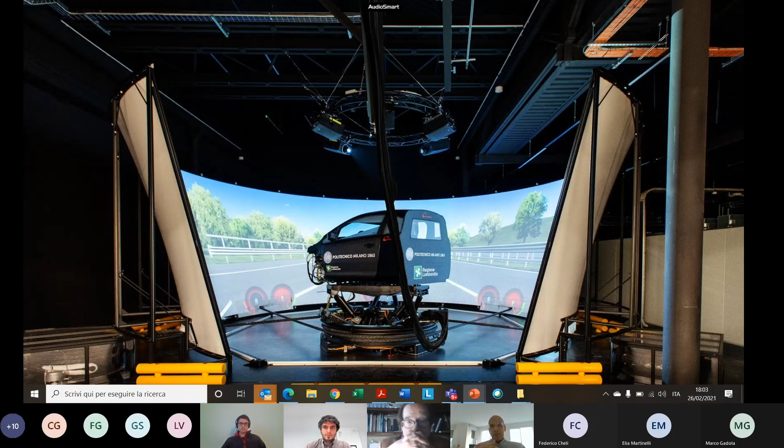We have organized a number of webinars. The first was on Industry 4.0 and the automotive design process. The second was on intelligent transport systems, Industry 4.0 and traffic. The third was on green vehicles and lightweight construction, and today's seminar is on intelligent transport systems, Industry 4.0 and human-machine interfaces. Today's agenda tries to find the relationship between intelligent transport systems, Industry 4.0 and human-machine interfaces.

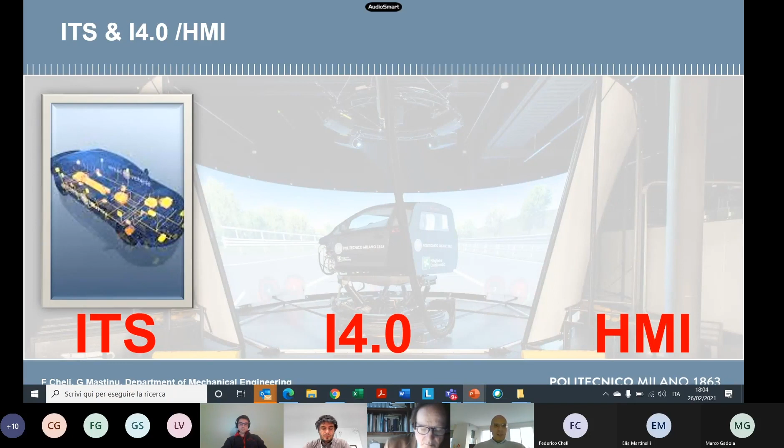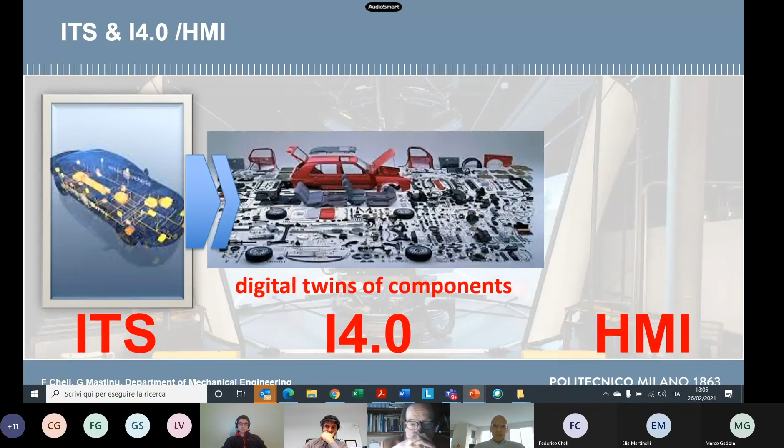Let us try to understand how this relationship works. When we talk about intelligent transport systems, we think of a vehicle with intelligent subsystems connected to the environment. Since the vehicle is composed of such intelligent subsystems, each subsystem has to be designed, and digital twins of components have to be developed to allow the proper design process of the intelligent transport system, vehicle included. This digital twin is a paradigm of Industry 4.0, so you may immediately understand the relationship between ITS and Industry 4.0.

Since the digital twin of the human is not available, we have a driving simulator that allows us to include the actual human in the loop and complete the loop for the design process.

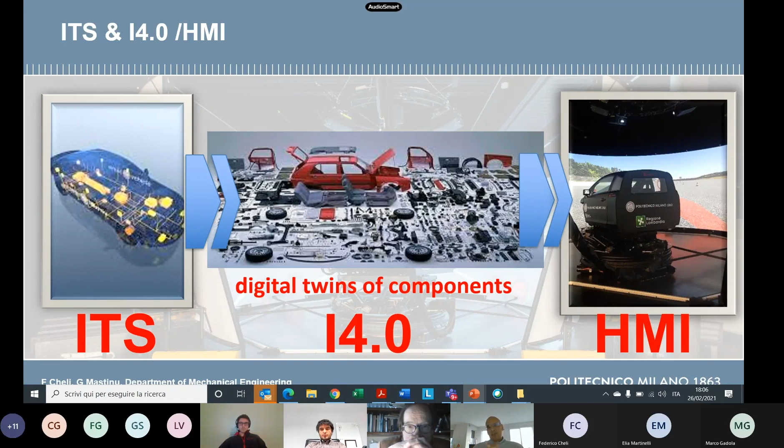Of course, to better understand the perception of the driver, we must record human-machine interface data and signals, and this will be the topic of this evening's webinar. So, today's agenda...

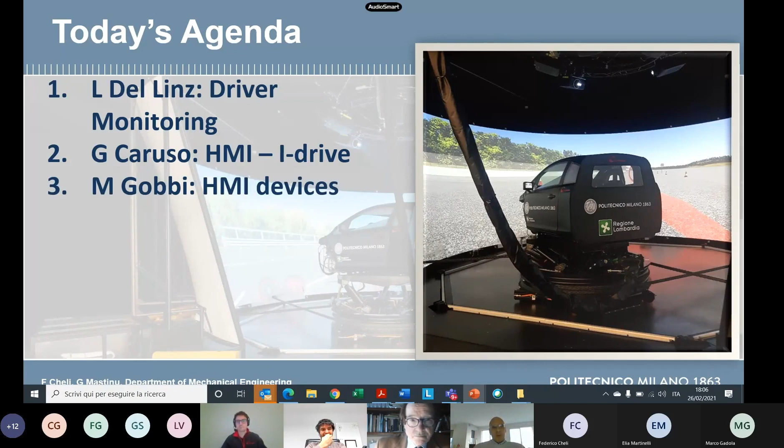refers to the presentation of Engineer Del Linz, who will talk about driver monitoring; Professor Caruso, who will talk about the human-machine interface and the iDrive laboratory of the Politecnico di Milano; Professor Gobbi on a number of human-machine interface devices; Dr. Fossa on the ethics of connected automated vehicles; and finally we will have a discussion.

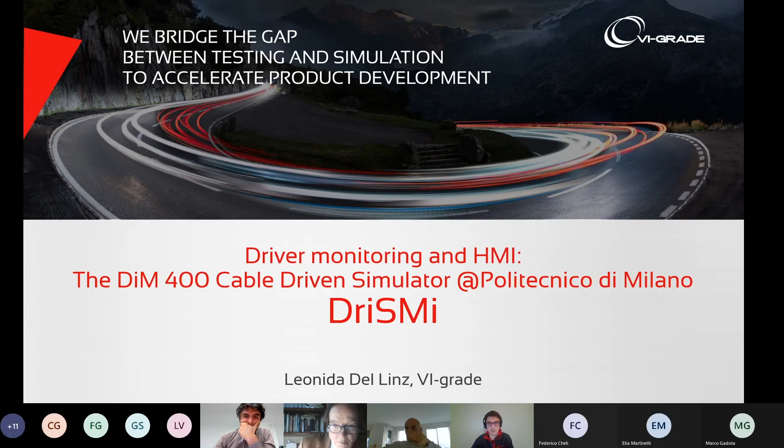As introduced by Professor Mastinu, these slides are about driver monitoring and human-machine interfaces related to the DriSMi simulator at Politecnico di Milano. The first question is: why use VI-BioTelemetry? Why do we need to acquire signals from the driver, active or passive?

Basically, we all know that new technologies will make cars safer and more efficient than ever. It's easy to understand that we need to bridge the obstacle, which is human acceptance of these new technologies applied to new vehicles. Today, for example, ADAS technologies are responsible for a transition in which the driver is no longer a driver, but becomes a passenger.

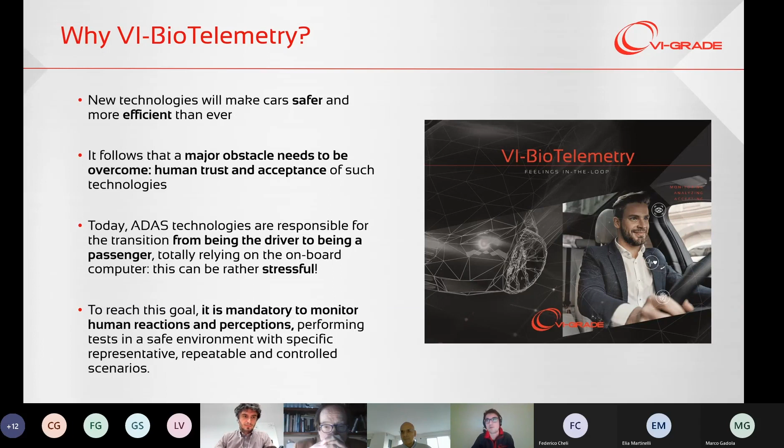So all the subsystems of the vehicle must be accepted by the driver in the best way. To reach this goal, it is mandatory to monitor all human reactions and perceptions, acquiring all the signals we can from the human body, and performing tests in a safe environment with specific, repeatable and controlled scenarios. That is possible using driving simulators, for example.

The VI-Grade solution is the following: we help customers investigate and understand the levels of human acceptance of new driving technologies. We have designed an innovative set of tools capable of recording, elaborating and post-processing all human reactions and body responses to a specific driving scenario using a driving simulator.

To define the stress level of the driver, and also of the passengers, the VI-BioTelemetry package acquires the following human body signals: skin potential response (SPR), electrocardiogram (ECG), and also eye tracking signals, thanks to our partner, Smart Eye.

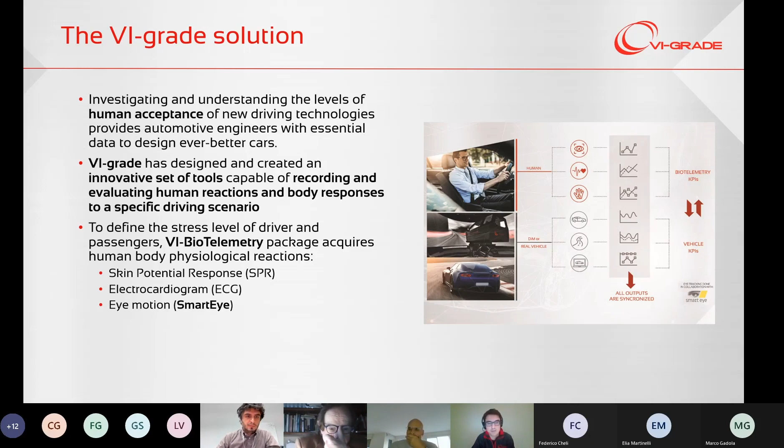A brief story on VI-BioTelemetry: we started working in 2014 in collaboration with the University of Udine and Policlinico Gemelli in Rome. Two years later, the psychologist team of the University of Padova joined, thanks to Professor Luciano Gamberini. Last year, in 2019, we obtained CE and FCC certification for the European and North American markets.

In the last 5 years, there have been a lot of publications in international journals like I4.0, Sensors, Measurements, and so on about VI-BioTelemetry. Regarding the human stress level, this is related to the activity of the sympathetic and/or parasympathetic divisions of the human autonomous nervous system.

The first division, the sympathetic one, is activated when the subject is faced with dangerous or potentially stressful stimulus, and it manages the so-called fight or flight situations. When the sympathetic division is active, among other functions, it increases the cardiac and pulmonary activity, the sweating, and dilates the pupils.

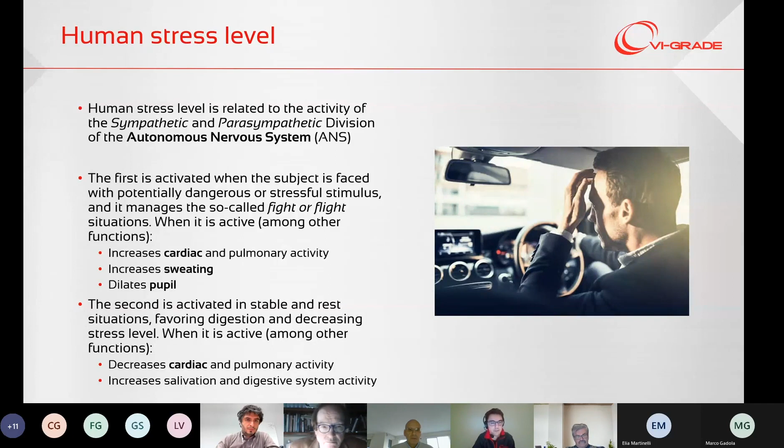About the first signal acquired by the VI-BioTelemetry package, the skin potential response, it is acquired from the palms of both hands, and it represents basically the electrical activity of the sweat glands. Its typical shape is reported in the picture on the right, consisting of a flat condition when the subject is in a rest situation, without stress stimulus, while it peaks when the subject is exposed to potentially stressful stimulus.

In this picture we can see two stressful stimuli, and we can see two peaks in the signal. To prevent any disturbance or noise due to the mechanical activity of both hands on the steering wheel, the University of Udine a few years ago studied and published an innovative algorithm to remove this so-called artifact noise due to the mechanical activity of the hands on the steering wheel.

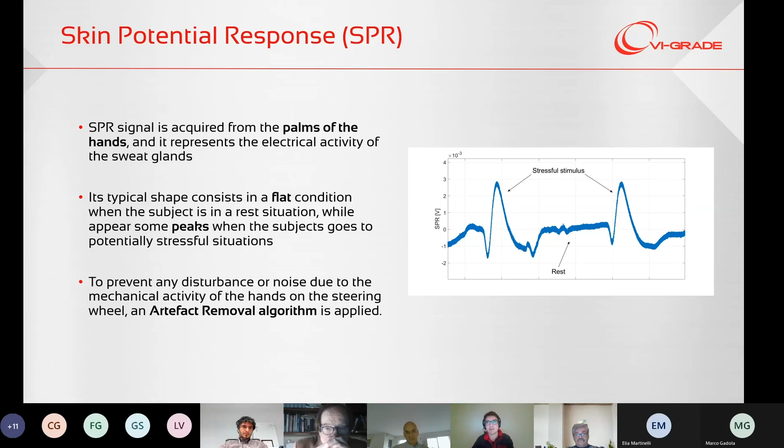In this case, we mix the two signals coming from both hands, and we obtain one clean SPR signal, which represents in part the activity of the sympathetic division of the autonomous nervous system. Regarding the other signal acquired, the ECG is acquired from 3 terminations of a chest vest worn by the driver.

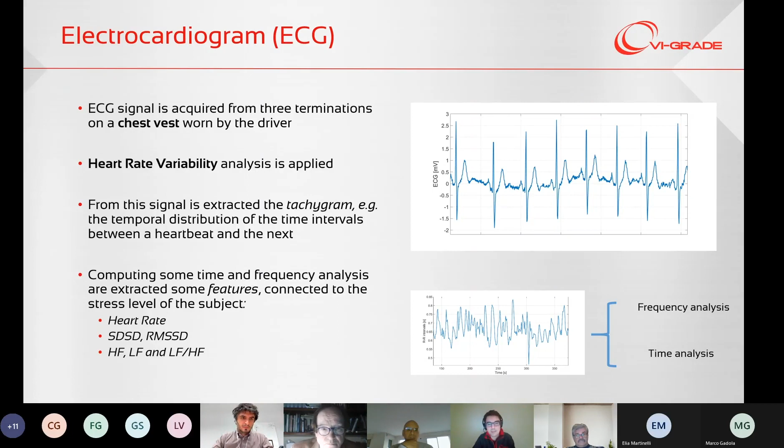In real time, a heart rate variability analysis is applied, both in time and in frequency, obtaining basically some features related to the stress level of the subject.

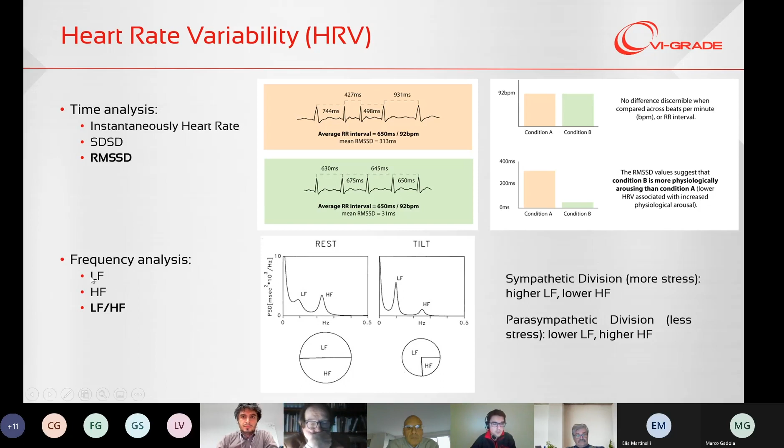In particular, regarding the heart rate variability, an important feature is the RMSSD, which can discriminate between stressful or not stressful conditions. The same thing is performed by the frequency analysis, obtaining the features reported here: low frequency, high frequency, and the ratio between the two features.

Regarding the VI-BioTelemetry kit, basically it combines dedicated hardware and software equipment for all this data collection and post-processing, all in real time. All these components are fully integrated within all the VI-grade driving simulator solutions, and in particular with the DriSMI simulator at Politecnico di Milano.

The core of the system is the so-called BioBox, which is basically a small box placed in front of the chest of the driver, and it takes care of the acquisition of the signals and the transmission to the concurrent machine, which performs the real-time elaboration.

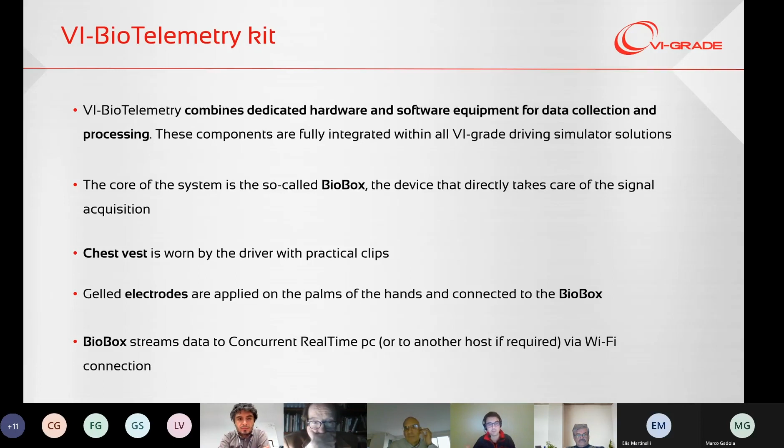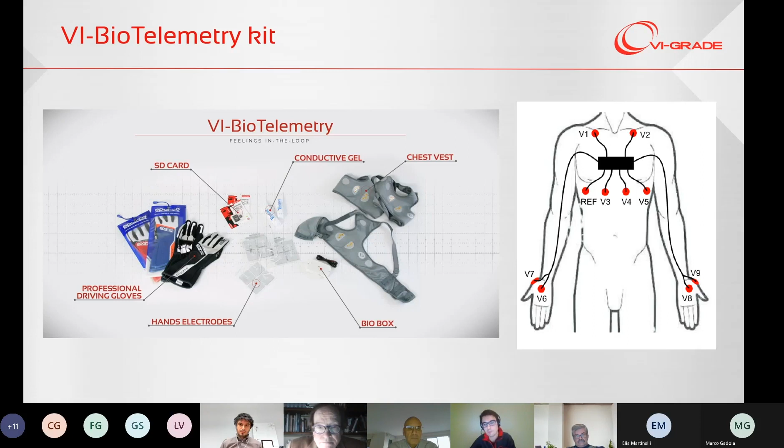Together with the chest vest, the driver wears also 2 couples of gelled electrodes on both hands to acquire the previously declared SPR signals. Here we have just 2 pictures: on the left, all the components of the kit, while on the right is represented the 6 terminations, the 6 electrodes on the chest vest to acquire the 3 terminations of ECG and the 2 couples of electrodes on the hands.

Regarding the real-time analysis and display, VI-grade provides 2 ways to show the real-time elaboration of these human signals collected and computed by the VI-BioTelemetry package, together with signals coming from any driving simulator, so vehicle dynamic signals and so on.

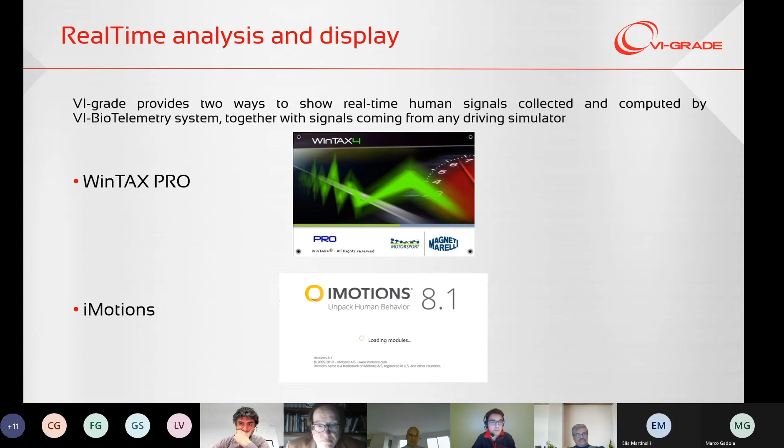Currently we support WinTax Pro and iMotions. WinTax Pro is more oriented on vehicle dynamics analysis or motorsport analysis. It acquires, shows and stores all the signals coming from the drive sim, but has limited post-processing algorithms included.

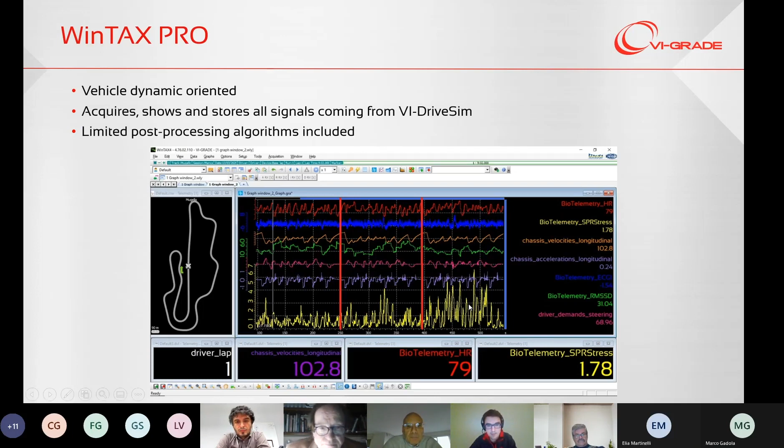In this picture we can see, for example, 3 laps on the Mugello track by a professional driver, and we can see that the yellow signal is the SPR stress signal, computed as I told before, starting from the 2 signals coming from the hands. We can say that, in this case, the last lap is the more stressful for the driver.

Regarding iMotions, it is a new software that has been part of the VI-grade framework for a few weeks, basically. It is more oriented to human behavior analysis, not only vehicle dynamics analysis, and it supports a lot of devices which acquire signals coming from your body.

So obviously our VI-BioTelemetry for ECG and SPR signals. It supports 2 eye trackers, which are Smart Eye and Tobii, and also some devices which acquire EEG signals, EMG, and also SCR signals.

It also allows the user to integrate digital surveys and questionnaires that could be submitted directly to the subject under evaluation during a test session, for example.

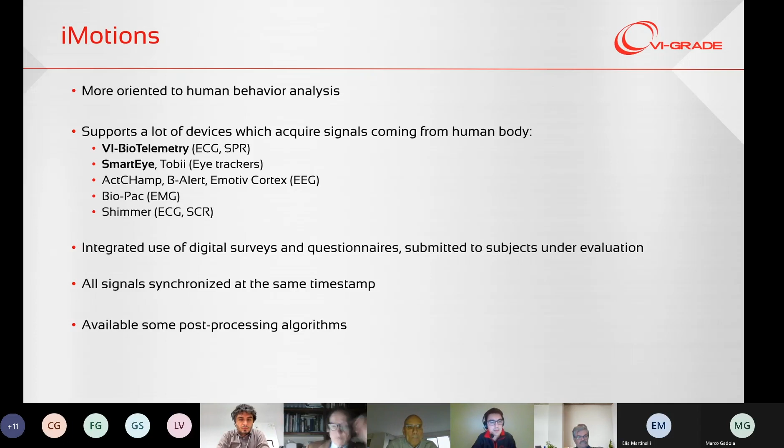All the signals are synchronized at the same timestamp and can be exported in a simple CSV format, for example. There are also some post-processing algorithms available within the software.

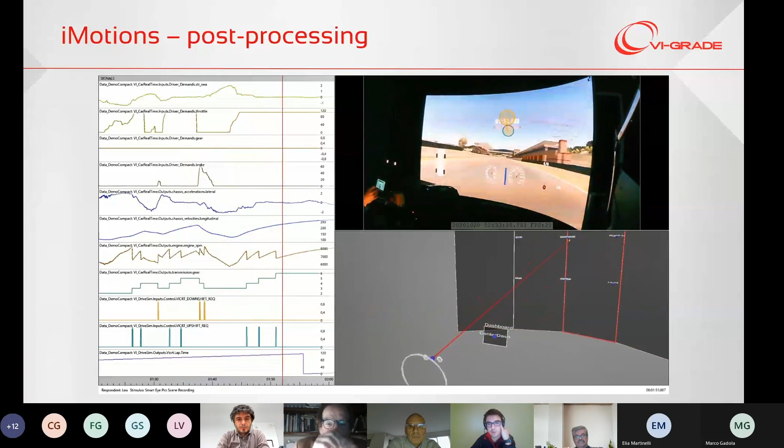This brief video shows a post-processing phase of a brief test drive session on our compact simulator. On the left we have all the signals coming from vehicle analysis from our solver, while in the upper part we can see a camera which reports, instant for instant, where the driver is looking.

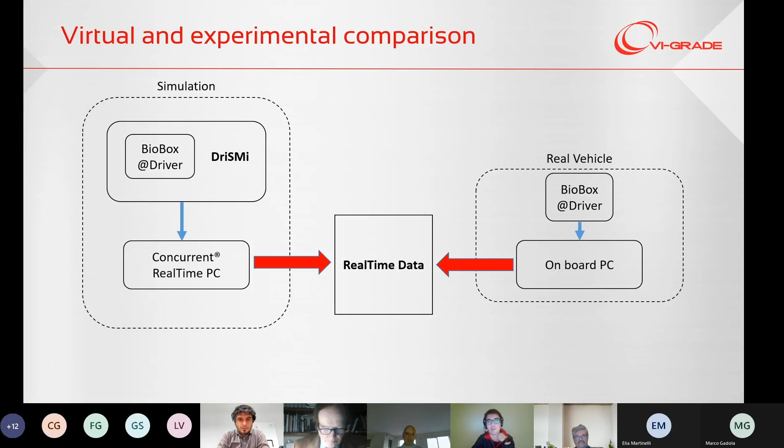So the gaze of the driver is projected on the screen and also on the dashboard. Just a specification: the VI-BioTelemetry kit can also be used on a real vehicle. If a driver of a real vehicle is equipped with our hardware and software tools, with a simple onboard PC, all the signals can be acquired and streamed to a real-time host receiver.

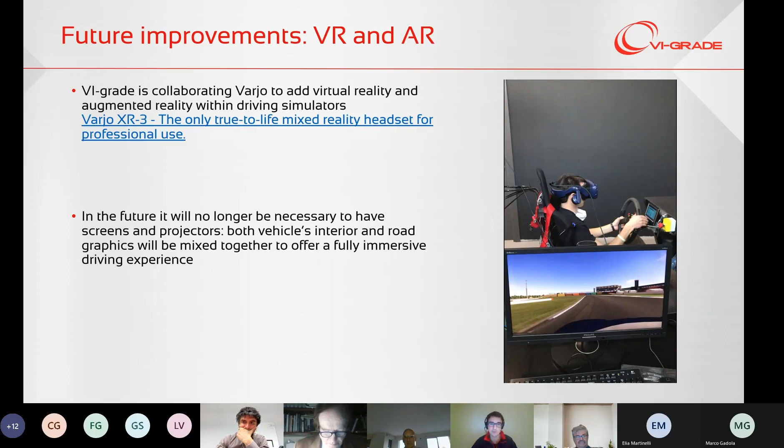Regarding the last two slides, future improvements on virtual reality and augmented reality: VI-grade is collaborating with Varjo to add VR and AR within driving simulators. We are working with the XR-3 visor, and in the future it will no longer be necessary to have a screen and projector, but the graphics of the vehicle interior and of the road will be mixed together to offer a fully immersive driving experience.

This small video shows the use of the XR-3 visor from Varjo, which also combines an accelerometer that acquires data in order to have the graphics related to the movements of our dynamic simulator, for example.

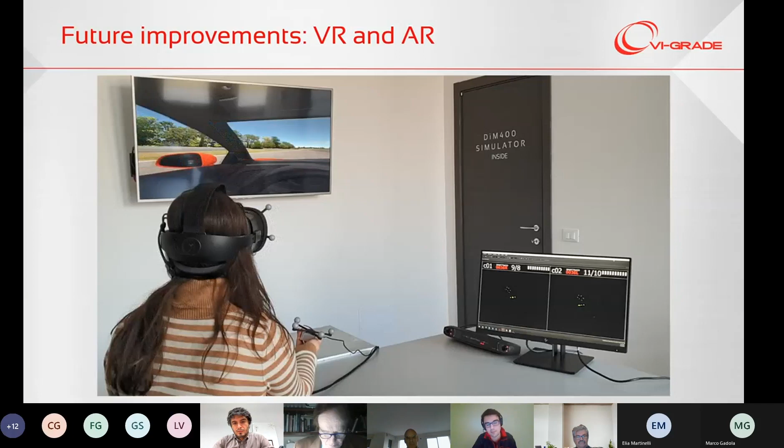To conclude, VI-BioTelemetry will be more and more extensively used for assessing human acceptance of passive, semi-autonomous and autonomous vehicles. We are currently working with Politecnico di Milano to prepare focus experiments to find the best way to evaluate the interaction between humans, drivers and passengers, and the entire traffic fleet and infrastructures.

All the real-time physiological data could be effectively synchronized and compared with the dynamic state of the simulation subsystems. Finally, human reaction to critical and risky driving conditions could be identified and studied in a controlled, safe, deterministic, and realistic environment provided by the DriSMI simulator.

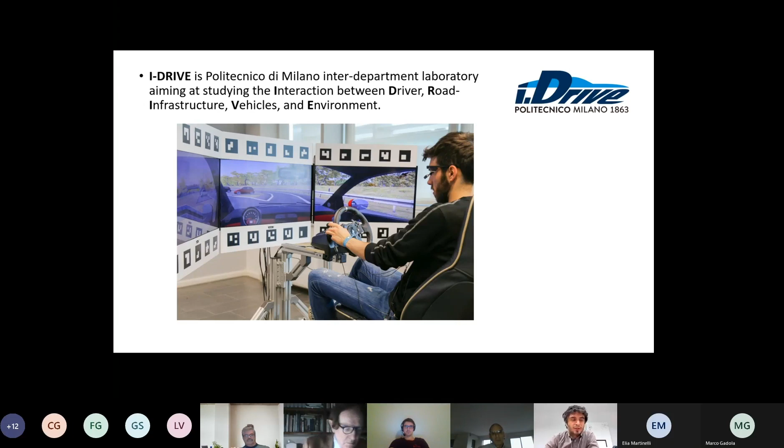My presentation relates to the role of driving simulators in user studies according to the various vehicle automation levels that we could have in the near future. What I will present today are case studies developed at the I-DRIVE Lab, an interdepartmental laboratory of Politecnico, where we specifically study the interaction between driver, road infrastructure, vehicles, and the external environment.

Finally, in level 4 and 5, the engagement of the human driver is more or less eliminated, and user studies should focus more on improving the experience of the user within the vehicle and the overall comfort within the vehicle.

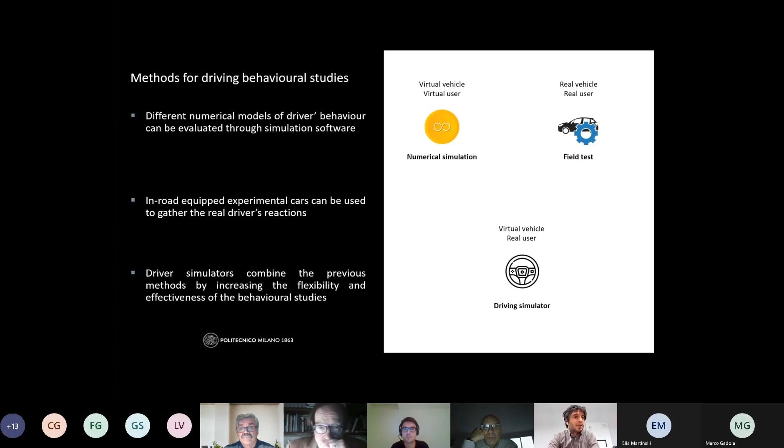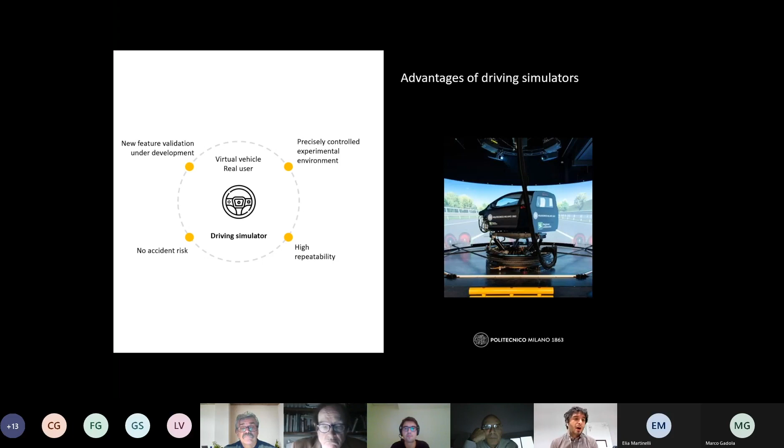But surely the most effective way to gather this data and perform these studies is using a driving simulator, where the combination of virtual vehicle and real user may increase the flexibility and effectiveness of behavioral studies. In particular, the advantages of a driving simulator are the possibility to control the experimental environment, the high repeatability of the test, and the possibility to check new features of the vehicle under development while avoiding possible accidents.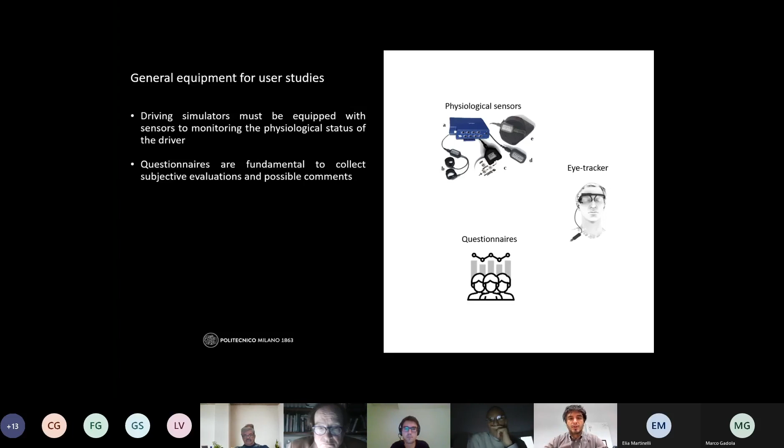In these studies, as we saw in the previous presentation, specific equipment is required. Specifically in our lab we use sensors similar to those described in the previous presentation: physiological sensors, an eye-tracker, and specific questionnaires to collect subjective evaluation and possible comments from the subject.

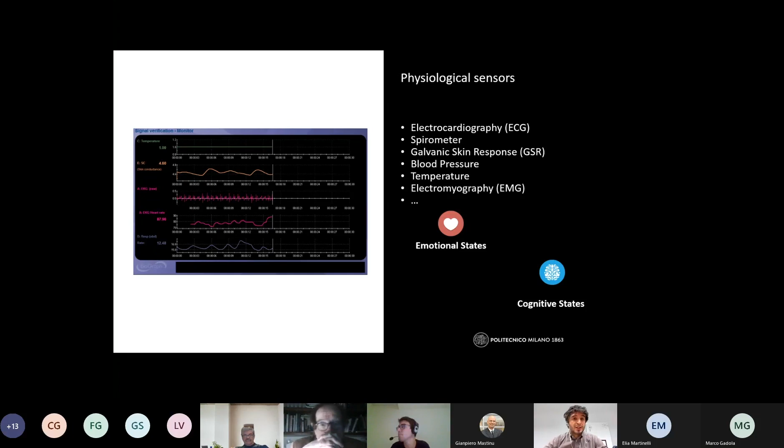The physiological sensors allow us to evaluate the emotional and cognitive states of the driver using different physiological signals like ECG, GSR, or EMG.

The eye-tracker is useful to evaluate the attention of the driver, for instance by measuring the pupil diameter, or by checking and monitoring specific eye movements like saccades and fixations, or to define specific fields of interest (FOI) during the experiment.

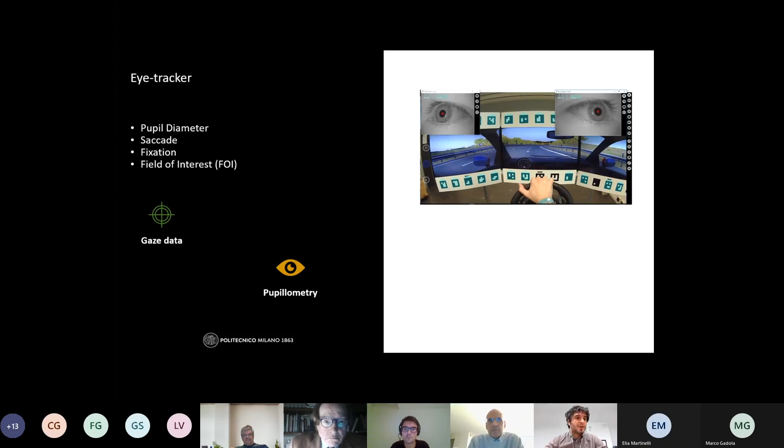In relation to the questionnaire, we organize it to assess the workload of the driver, the emotion, the fatigue, and the affective factors.

Standard questionnaires are available, like NASA-TLX, SWAT, or the Self-Assessment Manikin, and these are the ones we mostly use during our experiments.

In the next slide I would like to show some of our case studies related to specific levels of automation of the vehicle. So at levels 0 and 1, we had a specific experiment to evaluate the effectiveness of advanced assisting technologies in reducing fuel consumption.

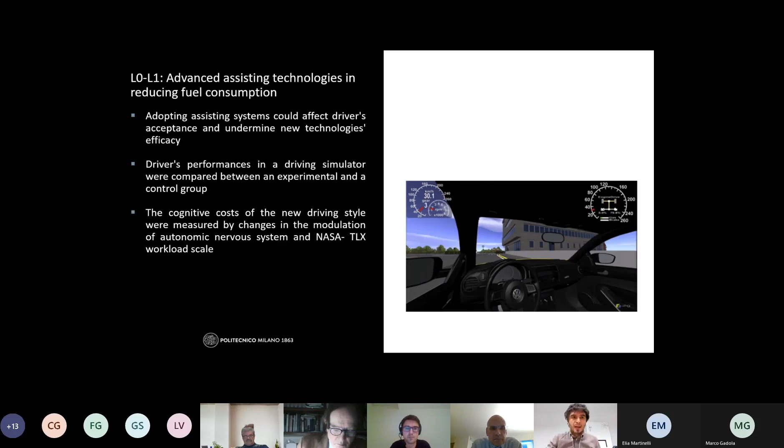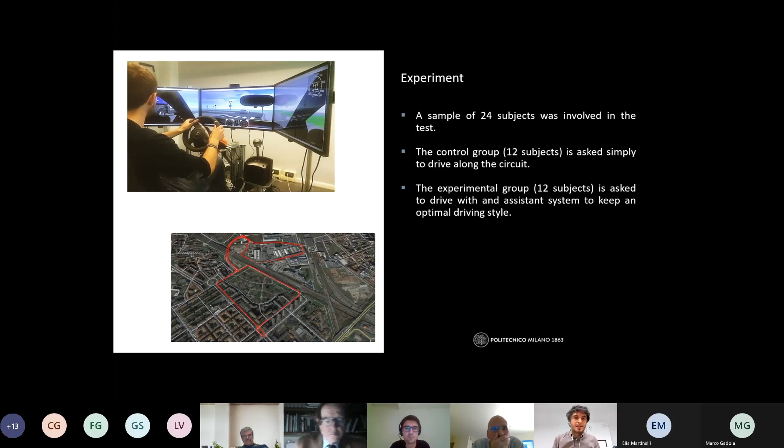The aim of this research was to evaluate the cognitive cost of adopting a new driving style for the driver. In this experiment we involved 24 subjects and split the sample into two groups: a control group and an experimental group. The control group was asked to drive normally along the circuit, and the experimental group was asked to drive using the assistant system to maintain an optimal driving style.

The results show that the assistance system helped the driver reduce fuel consumption, but on the other hand, the pattern of autonomic control over time showed that the tendency of the experimental group was increasing fatigue in maintaining the eco-driving style.

Finally, using the driving simulator software we were able to elaborate an ideal eco-driving style to be used as a reference to further improve the assistance system inside the vehicle.

Related to levels 2 and 3, semi-autonomous driving, here we see a scheme of the functions that a human or an autonomous vehicle could perform while driving. As I said at the beginning of the presentation, the takeover request is a crucial element to be investigated to evaluate the effectiveness of a semi-autonomous driving system.

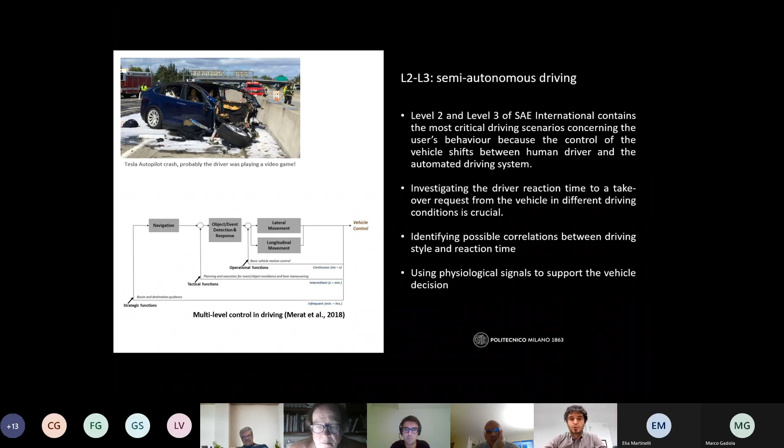The aim of this research was to identify possible correlations between driving style and reaction time, using physiological signals to support the vehicle's decision. We organized an experiment by developing specific virtual scenarios where drivers were asked to drive in an urban area and a highway.

Onto a highway with an automated function, physiological signals like EKG and GSR were gathered during the experiment.

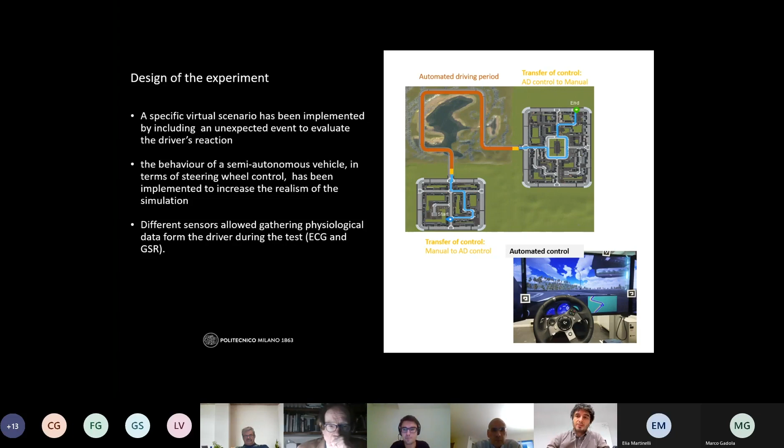What we achieved at the end was that there is a low correlation between the takeover response and the driving style; instead, the physiological signals could be used for supporting the vehicle's decision in activating the takeover request.

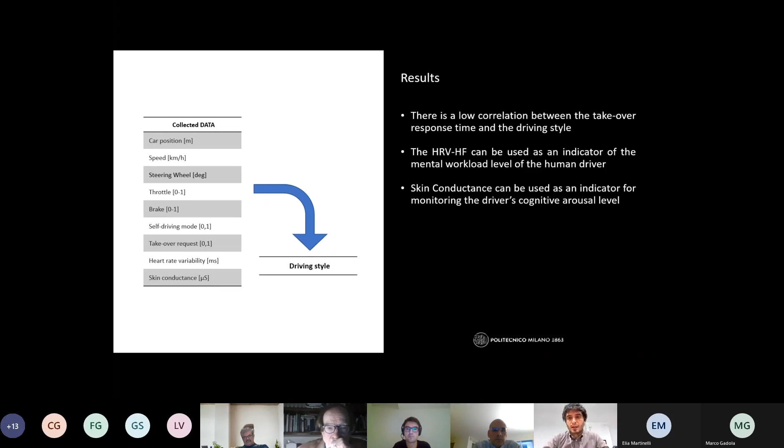Finally, moving the attention to the last part of the graph, the levels 4 and 5 of automation, we started defining possible new HMIs to increase the trust of the user in the autonomous vehicle, because one of the big issues of this system is that the driver needs to be informed of the reliability of the system installed.

Onto the vehicle, in order to trust the functioning of the vehicle.

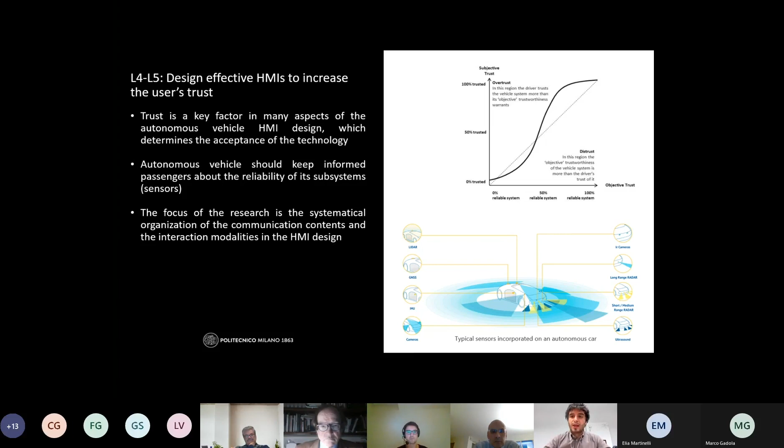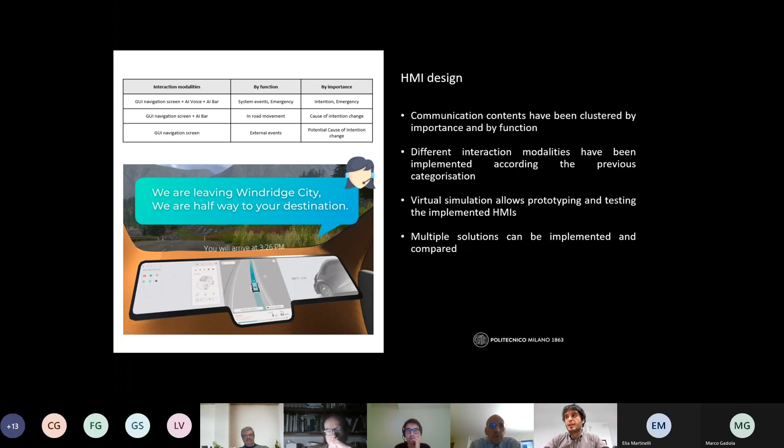What we did was organize and cluster the different interaction modalities by function and by importance, and according to this clustering, create a specific HMI using normal and common touch screens or head-up displays, but also speech recognition and voice synthesis to increase the driver's knowledge about the status of the vehicle.

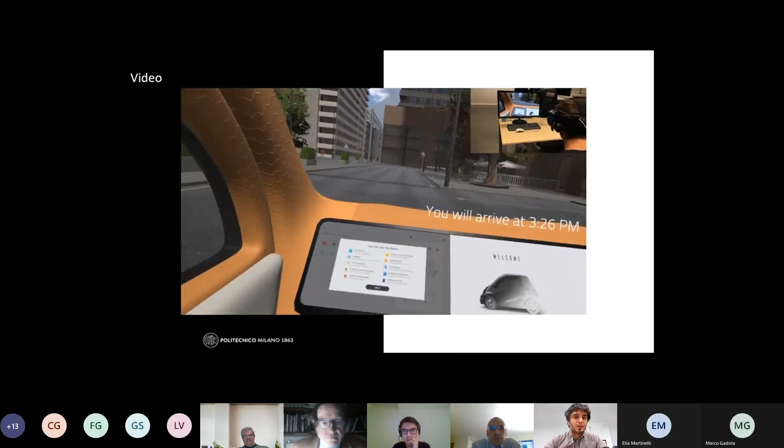In this last slide, I would like to show a short video demonstrating the functionalities of this advanced HMI.

Hello, give me a summary of the trip.

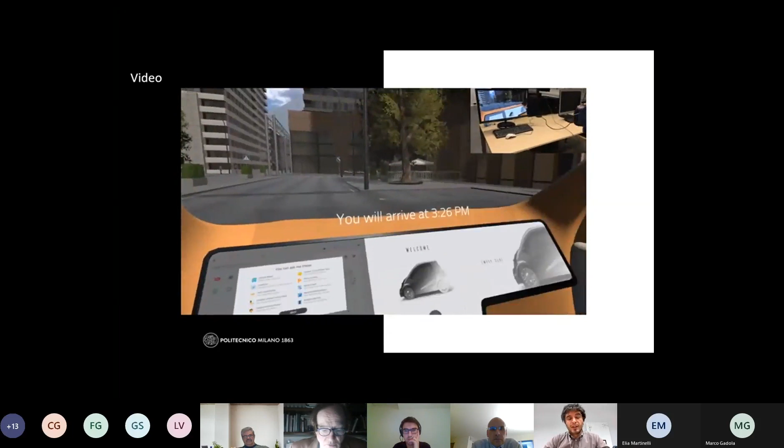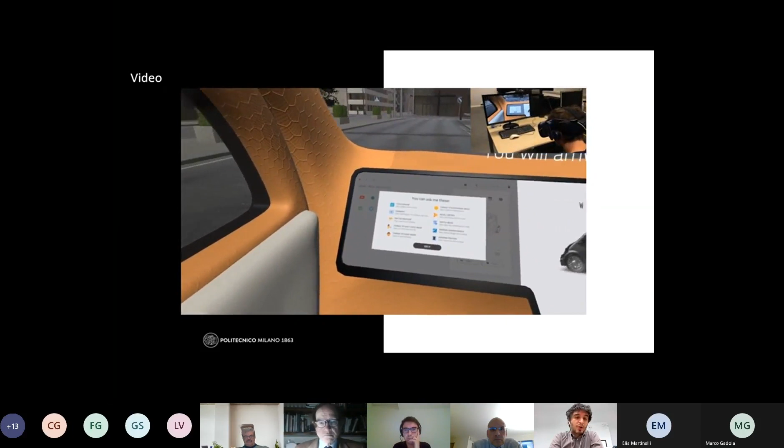Here we can see the voice control that enables some functions for the driver of the vehicle, and by using the virtual simulator we can evaluate this specific interaction before developing any kind of device.

All my sensors are unobstructed and working correctly. Enjoy your trip. Dropping the windows.

I'll focus on two activities that our team has developed, which are strongly correlated with Leonidas and Gian Domenico's presentation. The first one is an instrumented steering wheel that is really important because, as we know, the driver interacts with the vehicle by means of pedals, throttle and brake, and by means of the steering wheel to control the vehicle and follow the desired path. The loads that the driver exerts during cornering pass through the steering wheel.

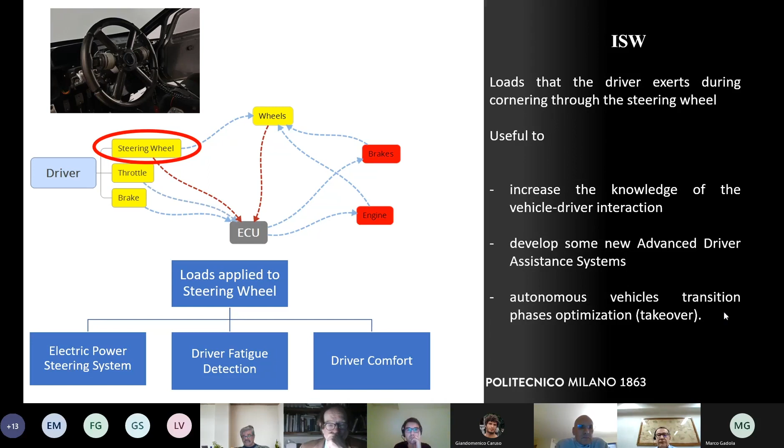Measuring this load can be really useful to increase the knowledge of the vehicle-driver interaction, to develop new driver models, new advanced driver assistance systems which can take into account this information, and to develop new power steering systems or new devices to detect driver fatigue level, or, as Gian Domenico already highlighted, to improve safety and driver comfort, particularly during transition phases for autonomous vehicles, or during takeover phases.

We have designed a steering wheel made of carbon fiber composite in order to maintain the correct mass and inertia with respect to a standard steering wheel.

On the steering wheel we have two 6-axis load cells, designed as shown, which are able to measure in real time the forces and torques acting at each handle of the steering wheel.

Inside each handle we have 3 additional load cells able to measure the grip force of the driver for both the right and left hand. Overall, we have 18 channels of force and torque that we are sampling at 750 Hertz on each channel.

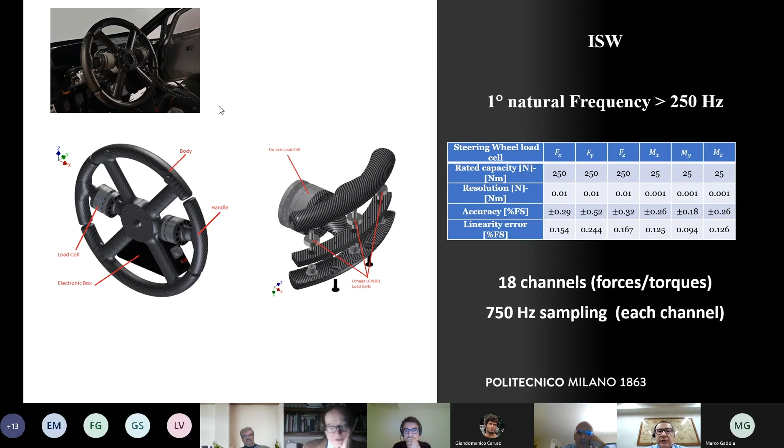As already described, the stiffness of the structure is really important, and the first natural frequency of the steering wheel itself is higher than 250 Hertz.

In this video - I don't know if you see the video. Probably not. Yes, we were. Yes, the video was playing. Okay, it was playing but I don't see the video. So if you see the video, it's fine.

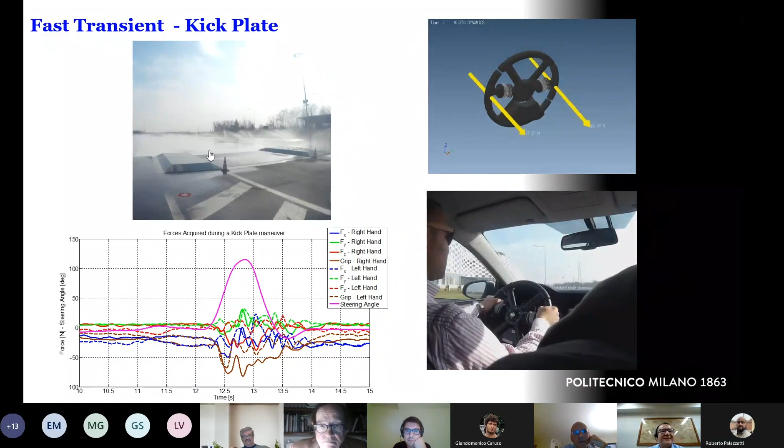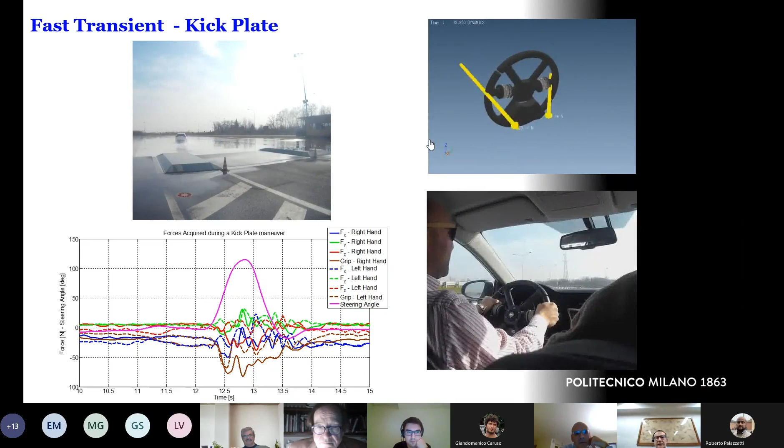You can observe the kick plate test. There is the kick plate sliding on the left side. Following the disturbance, the driver is requested to contrast with the steering wheel and to recover and drive in the correct direction. In the top right side of the slide, you see the real-time measure of the forces acting on the steering wheel during this maneuver, with the time history shown on the left side.

Usually, this type of instrumented steering wheel, of which there are quite a few described in the literature, is just used on static driving simulators. We have applied this on an actual vehicle.

We are planning to use this on the dynamic driving simulator. In this case, we need to compensate the fictitious force components due to inertia, the weight of the handles, and the effect of the rotation of the steering wheel itself, which generates centrifugal and tangential forces in presence of high-speed action on the steering wheel. We are going to get this information directly from the driving simulator in order to get the correct value of the forces themselves.

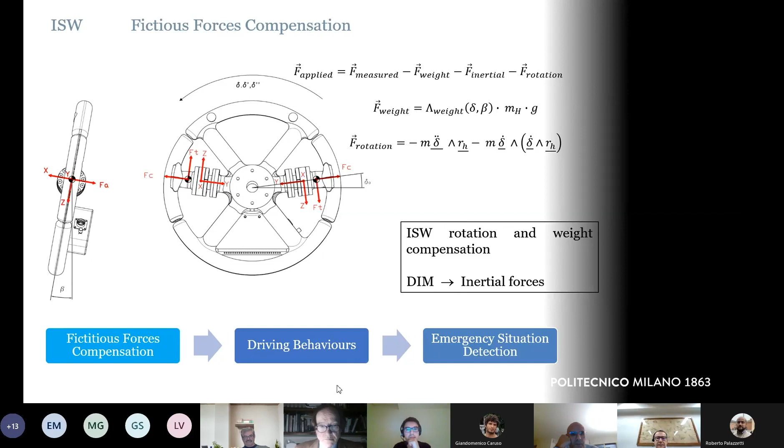We have used the steering wheel to analyze different driving behaviors. We have checked simple maneuvers and the response to the kick plate. This is just an example to highlight common driving behaviors between different drivers, both during normal driving and during emergency maneuvers.

Based on this type of analysis, we have developed new KPIs for evaluating the steering feel.

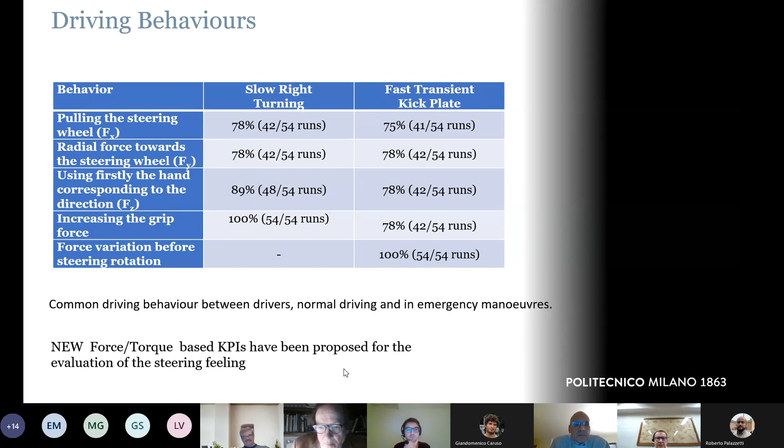A second activity, again related to what the colleagues have already presented, is a device able to evaluate the human response to external vibrations in an objective way. It's well known that evaluating human response to external vibration shows very high variability, not only among different drivers, which is called inter-subject variability, but even for the same subject.

While considering the evaluation of a professional driver, we have to take into account this evidence, also while considering a driving simulation. For this reason, we have developed a mechanical mathematical model able to reproduce the acceleration actually measured on the contact surface between the human body and the vehicle seat.

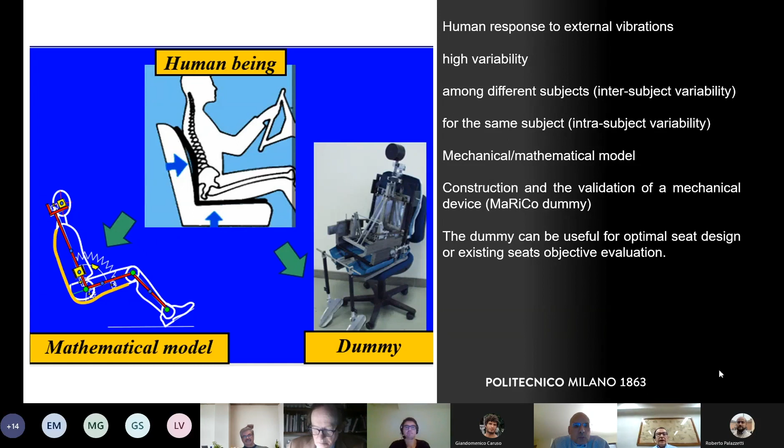Based on this human model, a specific mechanical device, let's say the dummy, has been constructed, and obviously this dummy is useful and can be applied to optimize the seat design or to evaluate the performance of seats actually in production, and it can be easily used on the driving simulator.

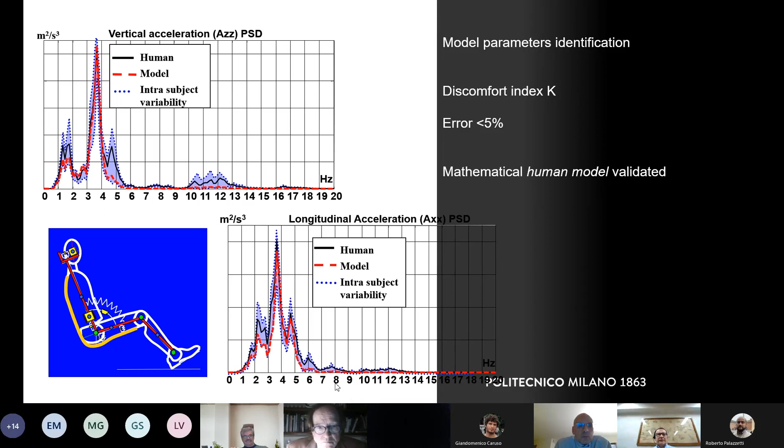First of all, there are some results referring to the model that has been developed after a proper parameter identification. You see there is a very good, reasonably good agreement between the measured vertical and longitudinal acceleration and the output of the model. If we use this information for computing a discomfort index, the K discomfort index, the error is lower than 5%. So we can say we have a validation of this model in the frequency range up to 20 Hertz. Based on this information, the dummy has been developed.

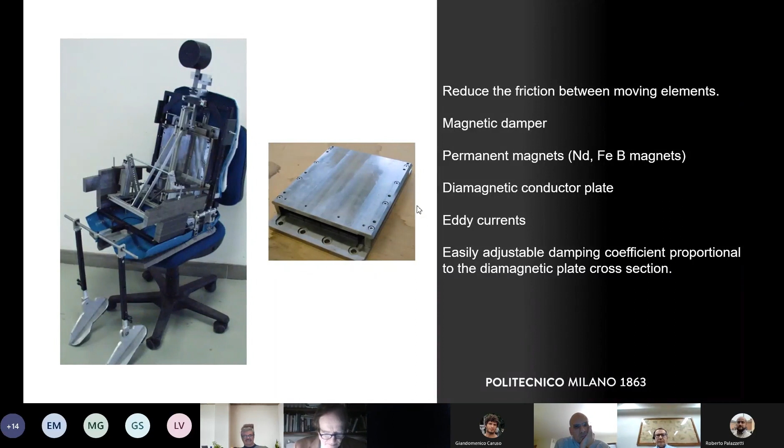There has been a very strong attention in reducing the friction between the moving elements inside the dummy. We have a mass which represents the abdominal moving mass, and the damper connected to this mass is a magnetic damper that is able to obtain a linear damping characteristic without any friction. So a pure viscous damping, which is adjustable by simply changing the thickness of the aluminum plate inside this damper, obtaining a damping coefficient which is perfectly proportional to this thickness.

The plan was to modify it and add deformable thighs. So the dummy can be used for evaluating seats, and it can be used on the driving simulator for objective comfort evaluation sessions. Thank you for your attention, and if you have questions, I'm ready to answer.

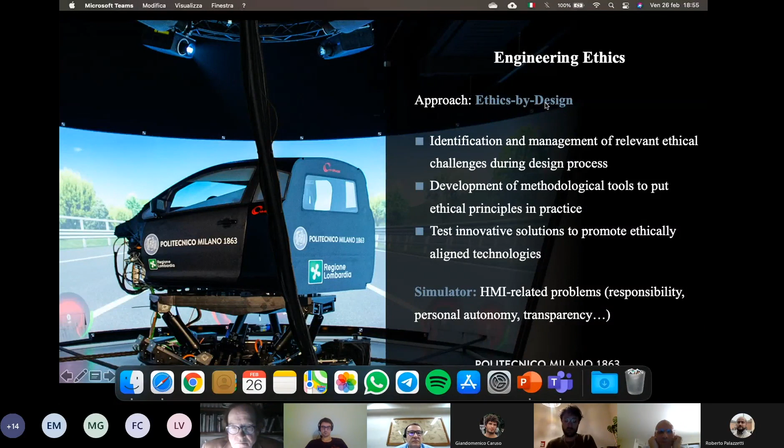It will allow us to research into many HMI-related problems connected to responsibility, to the respect of personal autonomy, for example, or to transparency, to trust. This is why it would be a great asset to move on with this research and try to get some actual, practical, tangible results in the integration of ethics into the design of our technologies.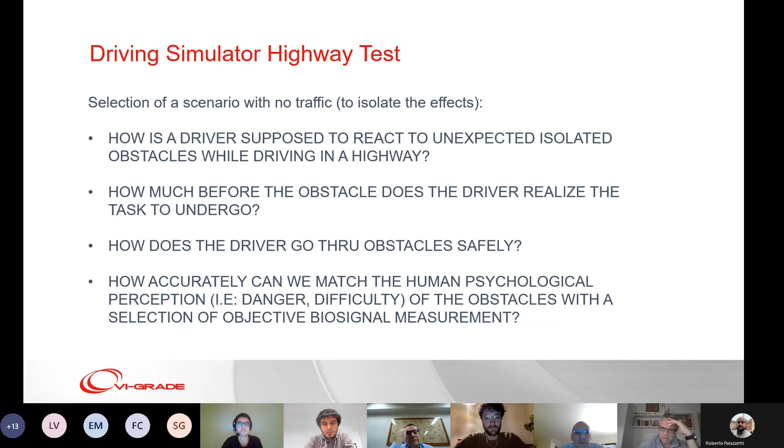For example, driving on a highway with an obstacle. How would the human react to this obstacle? How does it recognize the obstacle? At the same time, driving in totally human manual mode, or, which is possible in a simulator, driving in a totally automated mode. What is interesting is that in a simulator you can do level 5 without any problem, because you don't really need any authorization for it.

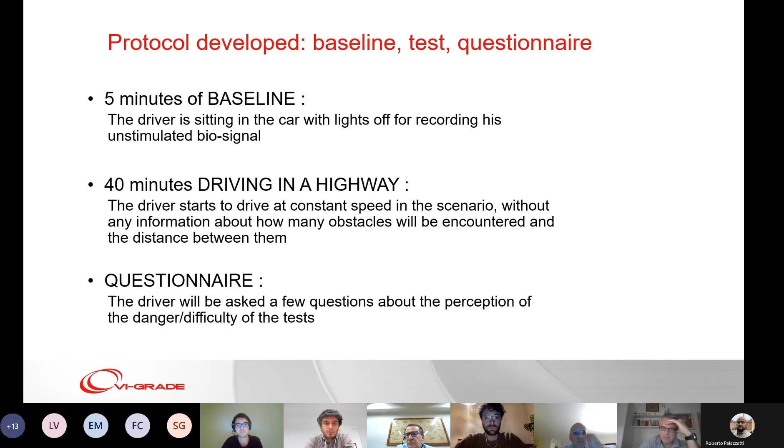It is totally safe. So we wanted to follow this case, and we used our biosignals as Leonida has introduced them, and also used a questionnaire supported by psychologists with the participants. We included a few obstacles, because one has to be able to recognize if an obstacle is perceived as difficult or simple, since sometimes, as you will see, a human driving through the obstacle is considered easier than having the machine drive through the obstacle. That's very interesting, in my opinion.

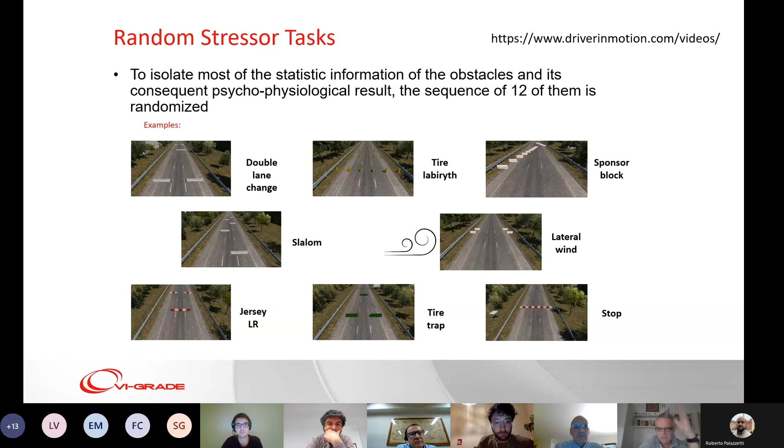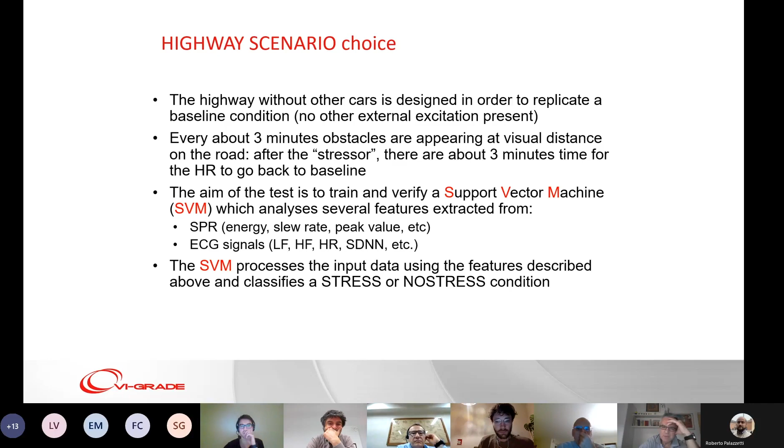So we had this type of obstacle presented randomly. Then we applied some technique, and also some methodology for having the obstacle repeated with the support of a psychologist. The aim of the test was also to train an SVM, a simple SVM, which could be used for analyzing the SPR and ECG signals.

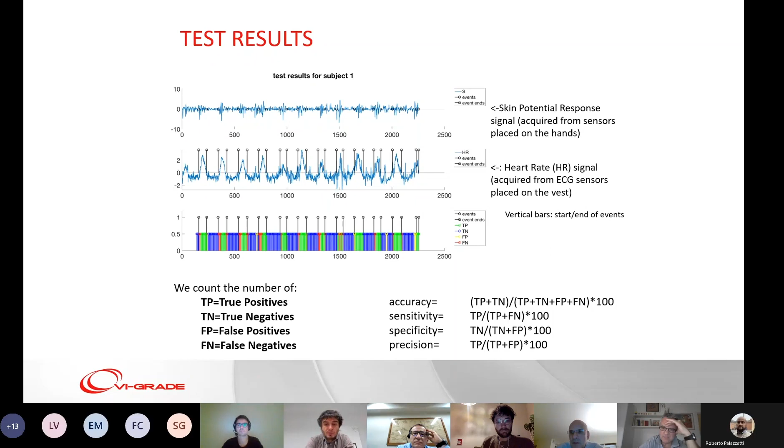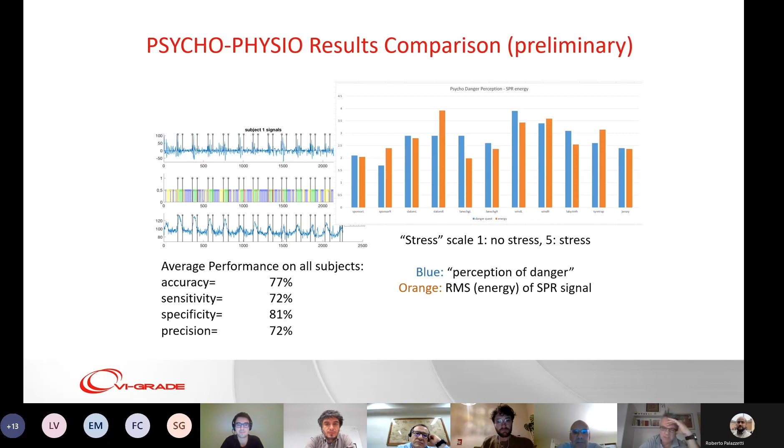And I'll show you some interesting results here. This is just the time domain, the skin potential response, a sample of SPR and ECG. Of course, we use a typical technique for extracting the reliability of the test itself, with TP, TN, FP, FN as usual. What is interesting is that we compute accuracy, sensitivity, specificity, and precision of the test, which I don't need to explain to the people attending, of course.

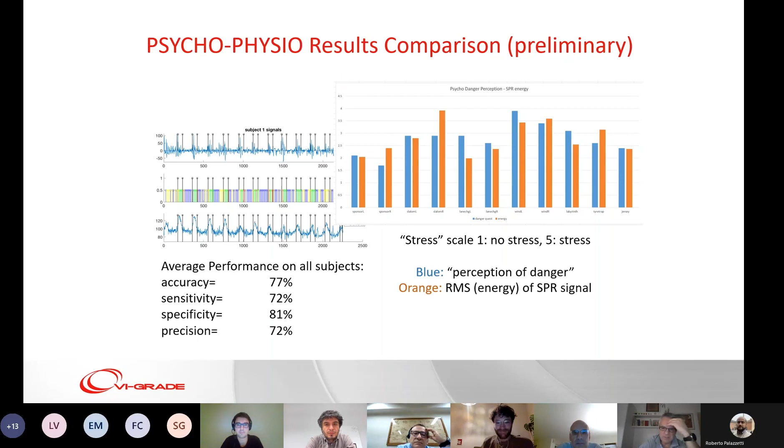What is super interesting, and I think we should look for something like this, is how much we could correlate the perception of danger, for example on a subset of stressor obstacles, with the biosignal. This has to be, of course, projected into the driving simulator reality, which is not reality.

So the first thing we learned with all these years of experience with biotelemetry is, first of all, to be able to recognize if the human is comfortable in the simulator, if the simulator is representative of reality enough that the results obtained on the simulator can be extended to the real car. Otherwise, it becomes a pure theoretical exercise. But as you see, not to take too much of your time, this just gives some hints and some stimulation of what could be done.

Stress can be identified as the RMS of the SPR, but one can also use heart rate variability. Medical doctors are very familiar with identifying variation in heart rate frequency, and can say stress level is going higher or lower depending on the parasympathetic or vagal stimulus of the heart.

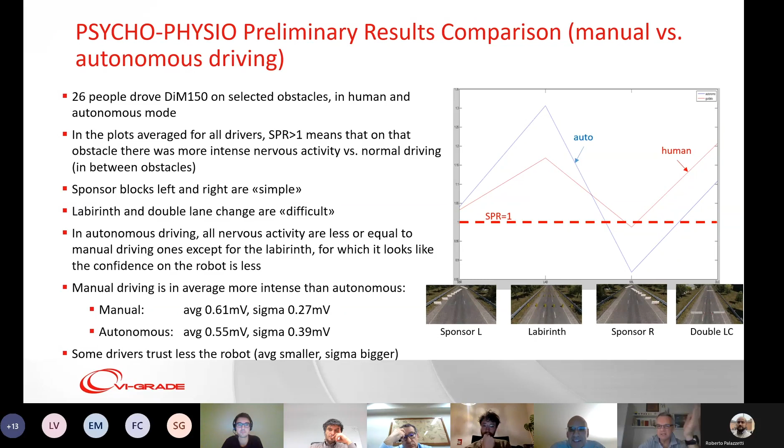But in other situations where the human mind projects the trajectory ahead, how does the robot project the trajectory ahead? It's much less obvious. I wanted to give my contribution and tell you we'd be extremely happy to assist in all senses, using what we have packaged in the simulator, but also considering results you want to extract using your own developed technology. We're basically in front of an infinite number of questions on this topic, many more than the typical engineering ones, but that's reality for autonomous vehicles.

Thank you very much, Diego, very interesting presentation. Getting back to my comment discussed together with Fabio, I think the stress is even higher with an autonomous car, and the fun is cut sometimes. I wonder whether the topic Giandomenico introduced, referring to acceptability, will be even more in the future a hot topic for such vehicles to be actually bought and trusted and accepted.